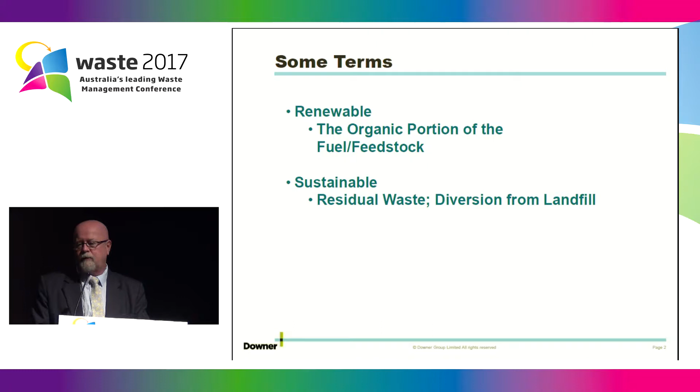So the trick in looking at a waste-to-energy solution is to understand how much waste you can commit, and that goes back to a number of things. It's not just what my tonnage is in MSW, etc., but everybody will move forward and say, oh, well, we could handle all the excess tomatoes, I'm sorry, that would be tomatoes here, with this technology. And yes, if you had enough tomatoes, it would work fine.

The problem is you need to understand how much waste you have, and if you start divvying up every bit of the waste stream into a particular technology, you end up at a point where you have not enough waste stream to supply any technology. So understand what you can do, how much waste you have, and what your streams are.

And that sort of leads into what is the makeup of that waste, understanding the waste, the calorific value, MSW, are you turning it into RDF, are you just supplying MSW, etc., because that will dictate the technologies if we're talking thermal.

You also want to understand if you're looking at anaerobic digestion, for instance, or MBTs, et cetera, how clean the waste stream is, because a lot of people are looking at FOGO as another bin, for instance, and you would think naturally that anaerobic digestion is the way to go, but how clean is that stream? Is there contamination? Will the wheels fall off the technology you pick if you decide to go down that path?

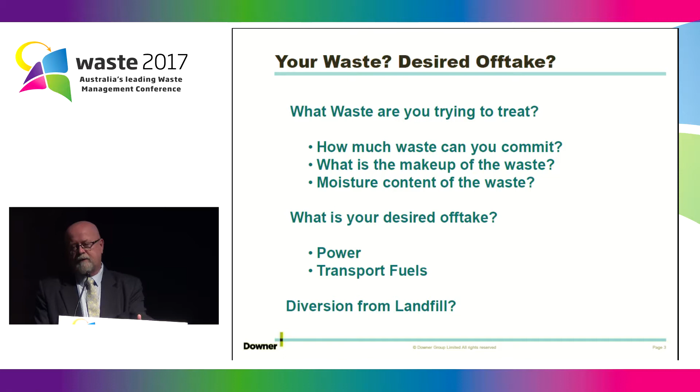And the other thing is, how important is diversion from landfill? We talk about the organic side and the carbon footprint, but if you're looking at the non-organics, that's the diversion from landfill. Some of the technologies create ash; there's about 30% ash created from each of the technologies. Some create less. So understand what the diversion goals are. If you're trying to maximize diversion from landfill, one technology is going to give you a better result than another.

So I've got a bit ahead of myself. The waste-to-energy technologies are broken into two things, the non-thermal and the thermal. The non-thermal is mechanical biological treatment and anaerobic digestion. So again, understanding the waste streams allows you to pick which one you want to go with. In thermal, we have incineration, pyrolysis, gasification, and plasma gasification. Not going to get into the debates about who's been here the longest, etc., but those are the main players.

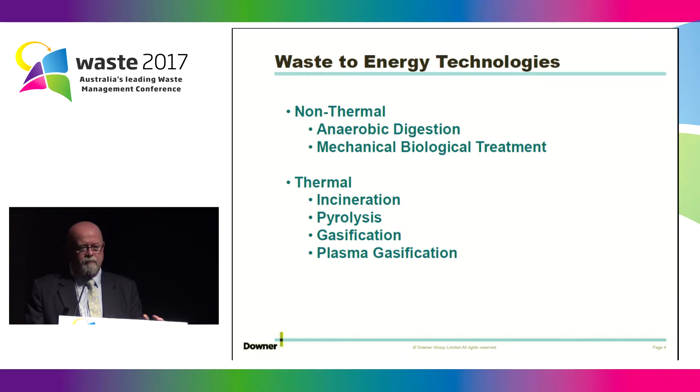Anaerobic digestion, as I said, is great for domestic sewage and organic waste, not great for unsorted MSW. The contamination side of things will stop the system cold. Unless, of course, you spend more money at the front end and take the contaminated items out, and then what do you do with them? The residue you get is a stabilized organic matter that can be used for soil amendment after dewatering, etc. Again, that's understanding what you're trying to achieve at the end of the day.

And anaerobic digestion isn't getting rid of waste so much as reducing the quantity at the end of the day. And methane gas is generated and can be used for energy generation, or you can just flare it.

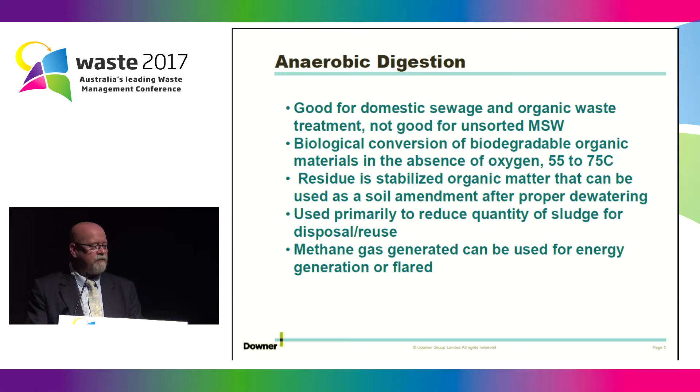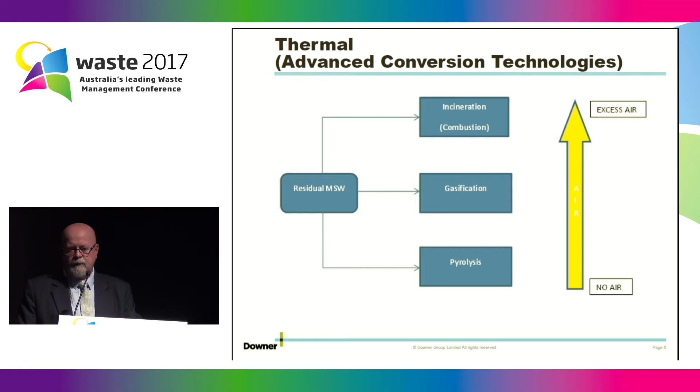When you're looking at the thermal or advanced conversion technology, the definition of the types of technology is really based on the amount of air used in the system. Incineration uses the most air; it's a combustion technology. Gasification falls in the middle, compared to pyrolysis, which uses the least. I didn't put plasma gasification on there because the operation of that technology allows you to use oxygen or air depending on how much electricity you're trying to generate, if it's electricity you're trying to generate.

So as I said, incineration: oxygen required to fully oxidize the fuel. It's combustion. I'm talking raw MSW here. I know there's C&I and many other types of fuels you can use, but I had to choose one, so I chose MSW. The waste is converted to carbon dioxide and water. In that temperature range, there are concerns for dioxins and furans. They have ways of controlling that, but it always has been a concern.

Again, about 30% of whatever you start with is left as bottom ash. Typically it goes to the tip, unless, of course, as the incinerator people will say, there are ways of using that in creating bricks or concrete, et cetera. I had one customer who said, oh, I think I'm going to go in that direction. Then he realized he had to start a 24/7 concrete manufacturing system, and he wasn't willing to deviate from his particular line of business to do so.

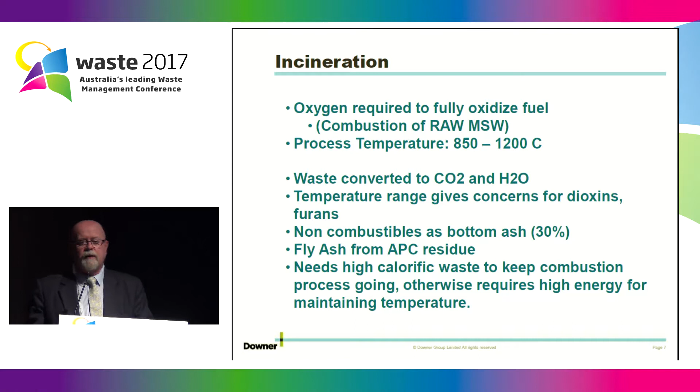The fly ash from the air pollution controls is an issue, often considered to be contaminated, but you can take care of that as long as you know you have it. And it needs a high calorific waste to keep the combustion process going. The actual waste itself is what's burning, so it's like a wood stove. You've got to keep putting wood in or you lose that combustion.

Gasification sits between pyrolysis and incineration from an oxygen point of view. It involves partial oxidization. It does require some heat to get things initialized, and then it sustains itself while it's going. The oxygen is added in small amounts for oxidization to occur. It's not full combustion like an incinerator. Temperatures are above 650 degrees Celsius.

It does produce a syngas, so that gives you more flexibility. You can use that syngas then to move forward to transport fuels, for instance, if it's not just electricity. The production of syngas versus just heat also gives you more efficient ways of producing electricity, because the syngas can actually run the generator as opposed to just being combusted for heat.

And the non-organic materials with gasification do become ash. So you still have about 30% of what you started with as ash, and that has to be tipped again. Or again, as I said, the incinerator and pyrolysis or gasification people can explain what their solutions are for that.

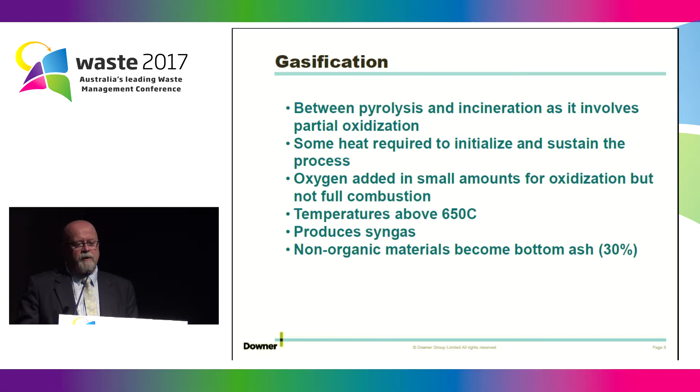Pyrolysis is a thermal degradation of the organic materials, and it's an external heat source, so you always have to be powering it, so it's not as efficient as some of the others. Again, the feedstock has to be fairly consistent. You see temperatures of 300 to 800 degrees Celsius. They maintain that for several seconds, and the downfall that we've seen with pyrolysis has been that of the batch process only.

Now, I'm hearing that there are people starting to look at running pyrolysis units in a non-batch mode. Now, you may ask, what's wrong with batch versus running it continuously? Depends on your output. If you're looking at creating power, you can't just turn it on and off. If it's base load power, you need to run this thing 24/7. And there's a lot of issues with turning these things on and off.

You don't just turn it on, get rid of some waste, turn it off, go home, come back and just turn it on. There's warming up periods, there's cooling down periods, etc. So it's batch, but it's not an on-off process. It takes time to do things. You get a char, an oil, and you get a syngas. So again, the syngas does allow you to do some other things. It's not just electricity. If you're looking at fuels, etc., you can go down that route.

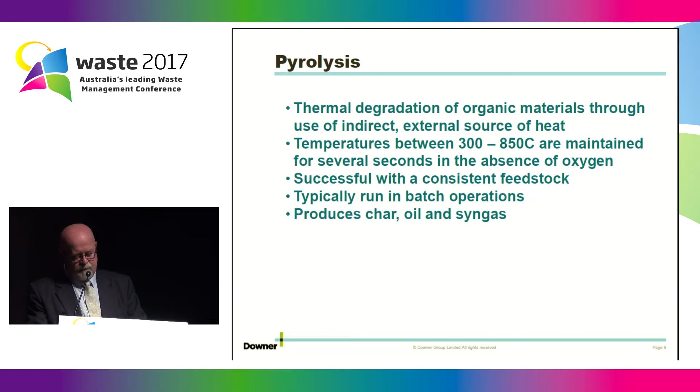2 minutes. Geez, I can't believe all the people here. My mom was going to come over from Canada so somebody would be in the audience. But it snowed.

Plasma gasification. Electricity passes through graphite and carbon electrodes. Plasma is supposed to be the fourth state of matter. And temperatures are over 3,000 degrees. Down the vessel, probably 1,600. But you get rid of that issue about furans and dioxins because the temperature is so high. All the organic materials are converted to a syngas. That syngas, again, is good enough to actually run a recip engine, or you can use it for combined, higher efficiency electricity generation, or you can do your transport fuels.

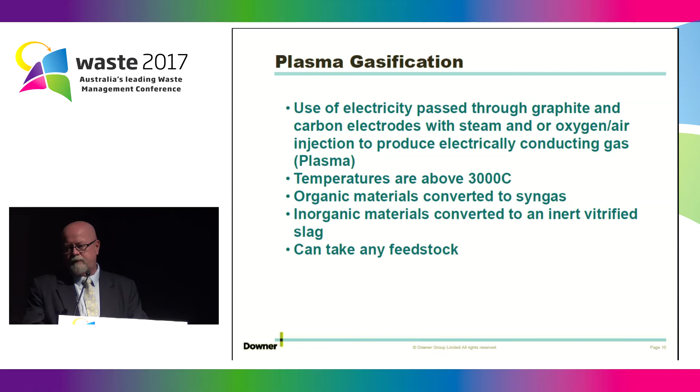The inorganic materials are converted to an inert vitrified slag. It's a glass-like substance that can be used for road base, etc. It's inert, so you don't have to worry about that coming back to bite you on the butt, so to speak. And it can take any feedstock. You don't have to have refuse-derived fuel, etc. You can just put straight MSW, etc.

Sources of revenues, just something to think about. Your tip fees, your electricity. I say electricity, it's any PPA, whether it's ethanol or whatever. The heat, maybe in Canada we think about heating, not so much here. Environmental attributes, you know, the EPAs, etc. There's some funding to be gained there. There's also the levy that you don't have to worry about once you start not tipping things. The aggregate can be used for road fillers, etc.

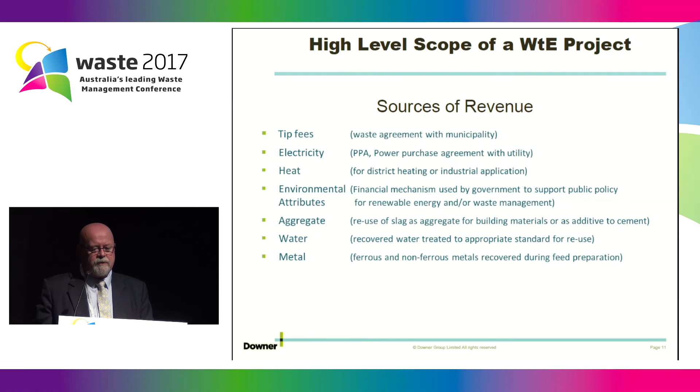Now I'm under pressure. And you've got, in MSW, usually 15 to 25 kilograms of metal per ton of waste, so you can recycle that. The water that's recovered is potable water, so that's recycling also. So I just did a synopsis of the different technologies, and I figured you guys would be getting your hands on this, so it's just to have a look at the different technologies and determine the feedstocks that work well with them, diversion from landfill, and some of the byproducts.